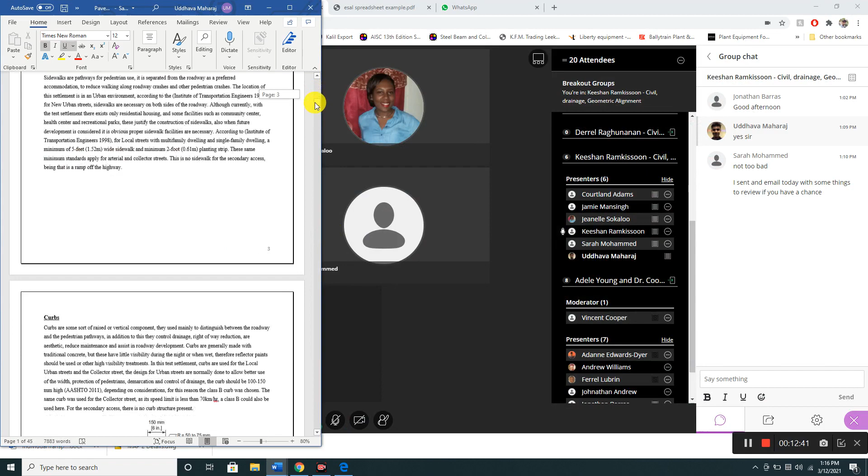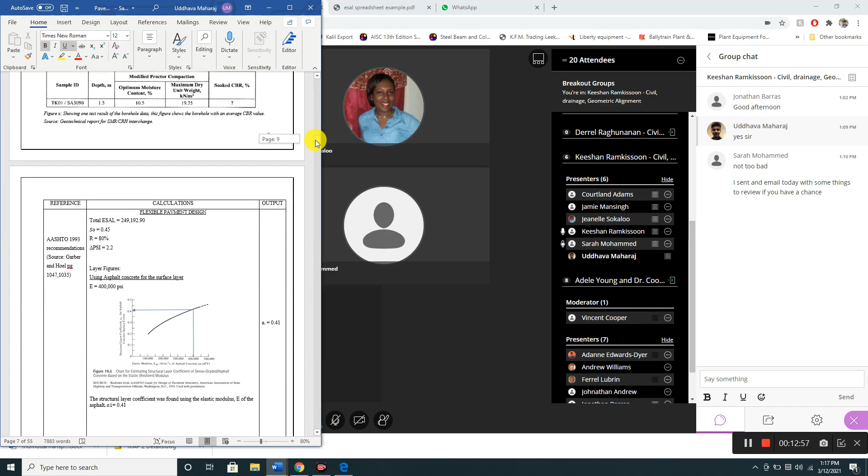It's also one of the guidelines from the AASHTO Green Book. Okay, no problem, so I'll note that down. Yeah, I also saw you use, well, you didn't use the alignment and profile tools from Civil 3D.

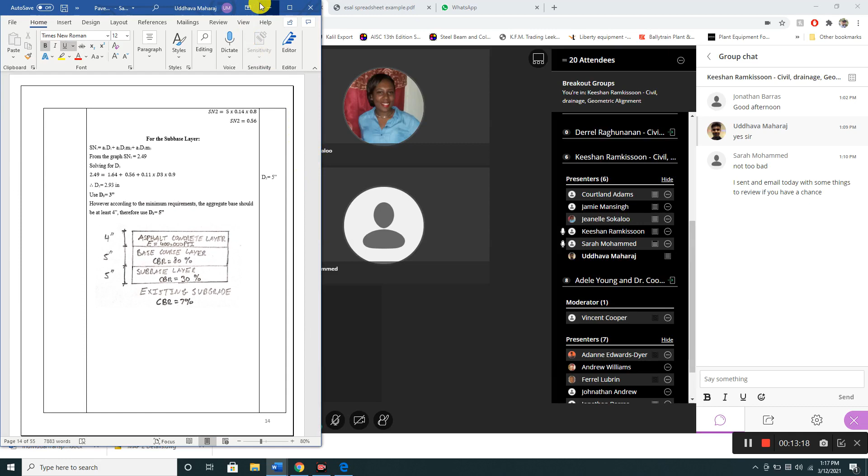Yeah, I did. Well, sorry, the design criteria tools. No? No? Okay, so I don't know. Let me just share my screen. So I'll just show you how to do this pretty simply, and show everyone as well.

Right, you all seeing? Let me know when you're seeing. Yeah, I'm seeing. Yeah, cool. Right.

Right, so this is site layout, simple grid layout. So what do you want to do when you create your alignments? Sarah, how did you create this alignment, from a polyline, or did you create from the alignment creation tools? From a polyline.

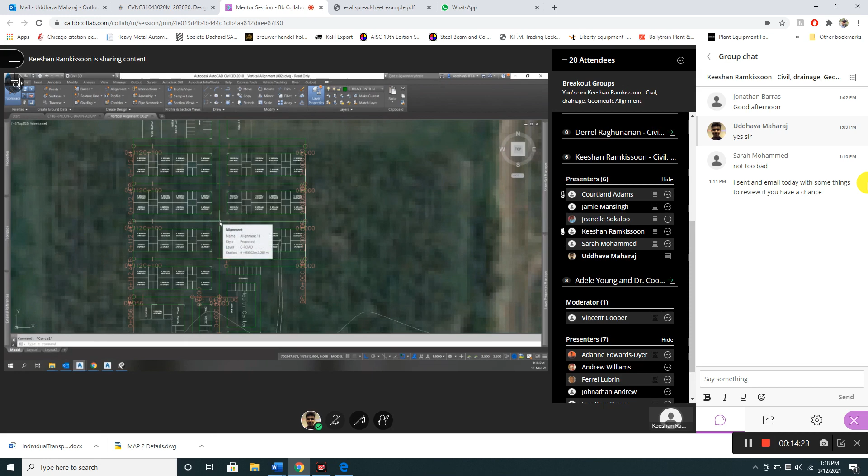Okay, no problem. So when you're doing that, after you use the polyline, let me just do one from scratch. So we have a polyline here. Tell me if I'm going too fast.

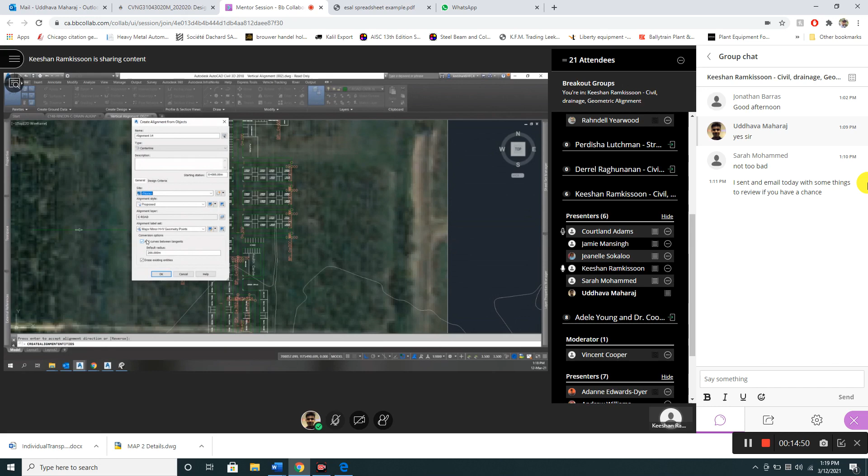All right, so you go on your alignment tab here, create alignment from objects. You want it to run from left to right. Press enter, accept direction, alignment 14, whatever. If you want to automatically add curves, you could do that. You can erase the polyline afterwards as well.

So probably for the internal roads, you don't really need a great design speed. You could use 20 or 30 kilometers per hour. What you would do is check your AASHTO and see what is your minimum radius for that, and then you could probably put in your automatic radius here. So I think for 30 kilometers per hour, it's about 22 meters. So I'll just go 30 meters here. Even though it's a straight line, it wouldn't have anything.

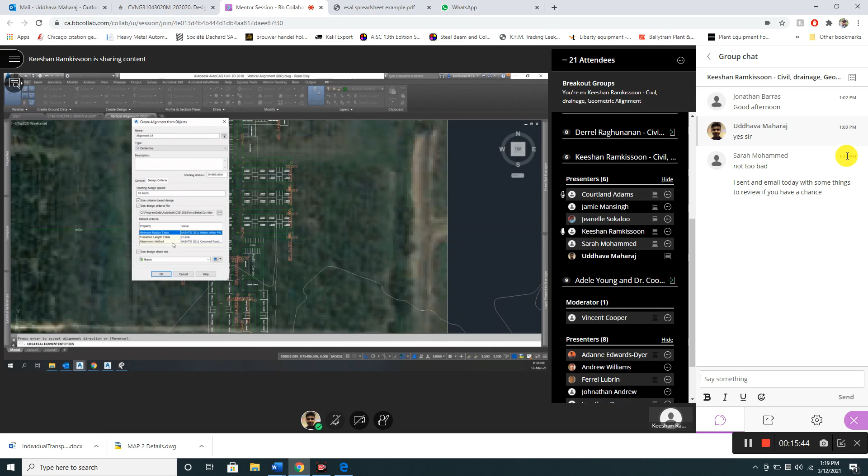But then you want to click on design criteria, and then your starting design speed. You want to put that as whatever design speed you're using, and then use your criteria-based design. Super elevation, just keep it at 4%, regular 2-lane, and then your attainment method. You don't have to worry too much about super elevation in your stage, but this is just general information. So then you press OK, and you create your alignment.

So that's for a straight line. So if you had a line, let's say - this is auto is on - so let's say we had a line like this. Some people's site may be varying, you'll have curves in it, and you want to do your alignment like that.

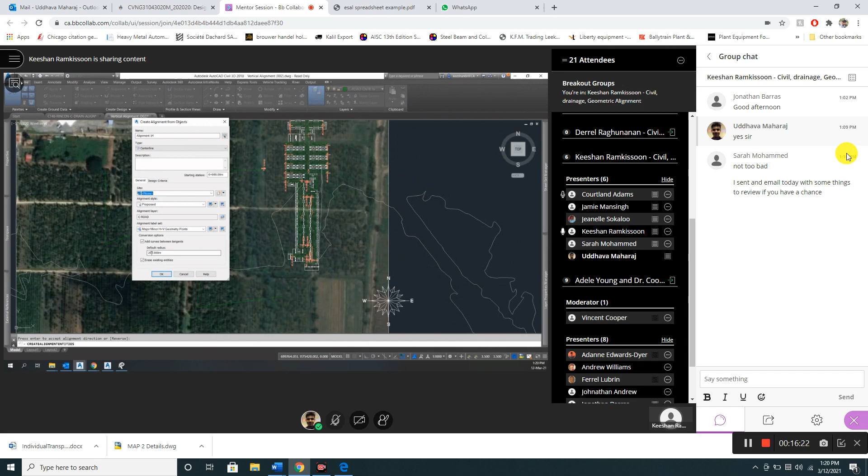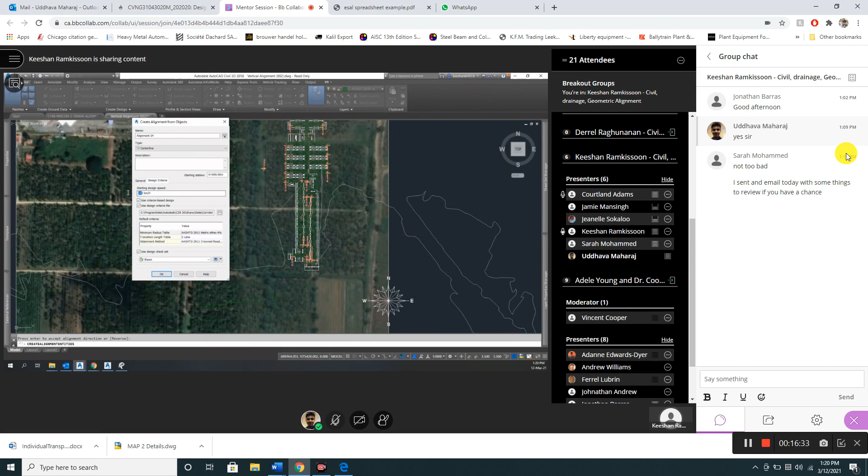Starting from the northern section, enter alignment, whatever. Say this is a design speed of 50 kilometers per hour. The minimum radius, I think, is 86 meters. So let's go with a default radius of 90. Design criteria, put in 50, press OK. And there you would see it automatically generates your alignment with your curves to the 50 kph design speed.

But I think some of these curves are actually kind of smaller than 90 meters. So what you would do, go on your alignment geometry. From this layout here, click on your panorama. Oh yeah, we have some radius that are smaller than 90. So we can always adjust that manually. I probably won't get to the minimum radius here, but this is just how you do it, just an example.

Everyone follows that? No? Yes?

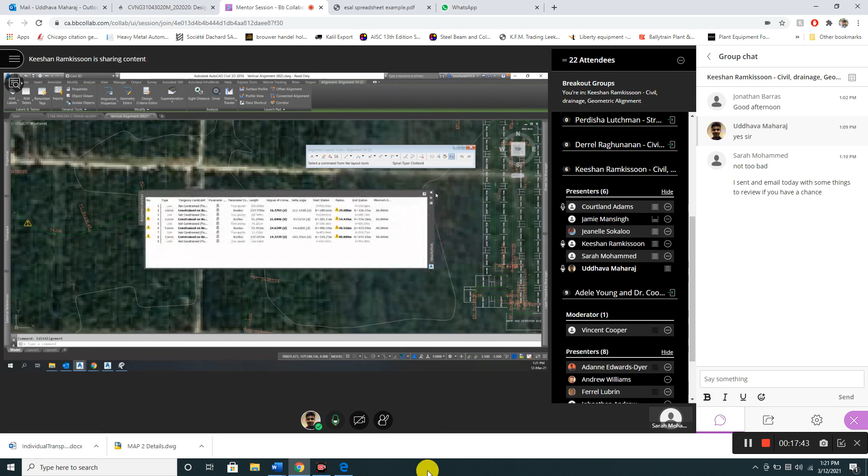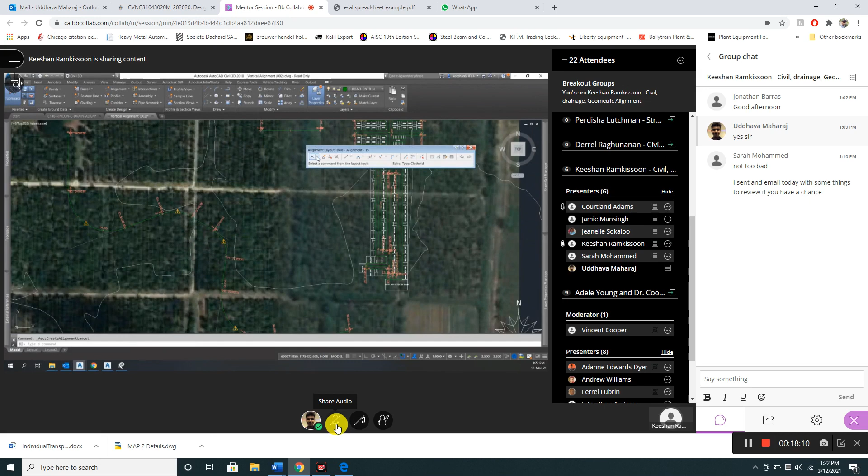Yeah, right. And well, if you want to create your alignment from scratch without using a polyline, go on alignment creation tools, put in your whatever name we have here. I think we reach alignment 15. And label it whatever. Design criteria, so you want to go 50 kph again. Press OK, and then from this you want to click tangent with curves.

So you could do that a little easier. Right, so that's how we create alignment. Pretty simple, no rocket science in that.

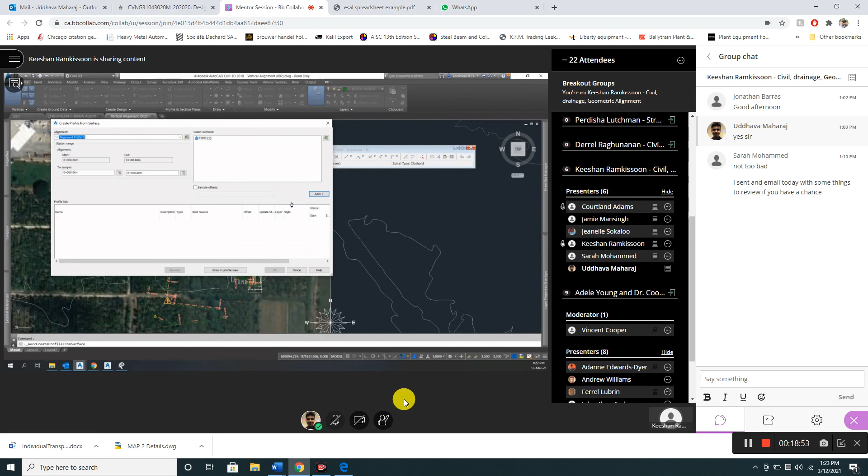Time for the profiles now. This was alignment 14 and 15. You go on your profile tab right here, create surface profile. You have the surface here, I think, what are we - I think it was this one, probably 4th, whatever the name is, you add the surface. Draw in profile view, you could edit your station range and profile view height and these other stuff.

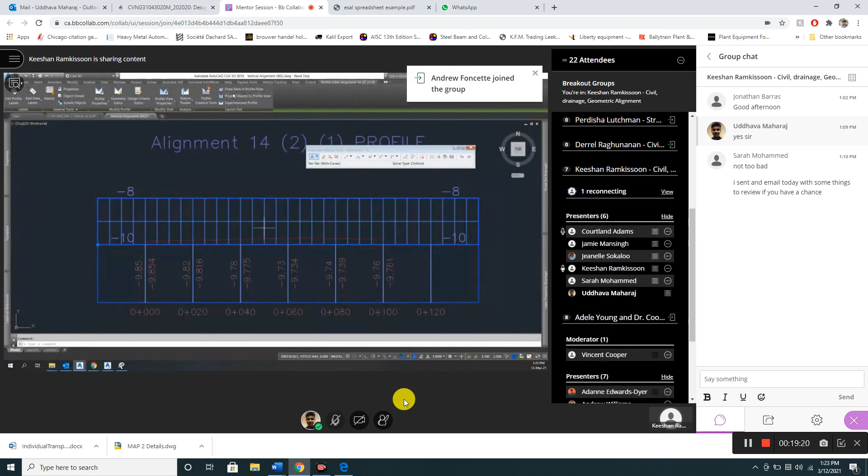Click a profile. So this is the existing ground profile here. Again, with these negative elevations, it seems kind of off. And then after you have your profile view, profile creation tools, so this will now become your proposed road profile. You can name this proposed. That's okay. Oh, there's one thing I forgot to do with that - draw a tangent with curves.

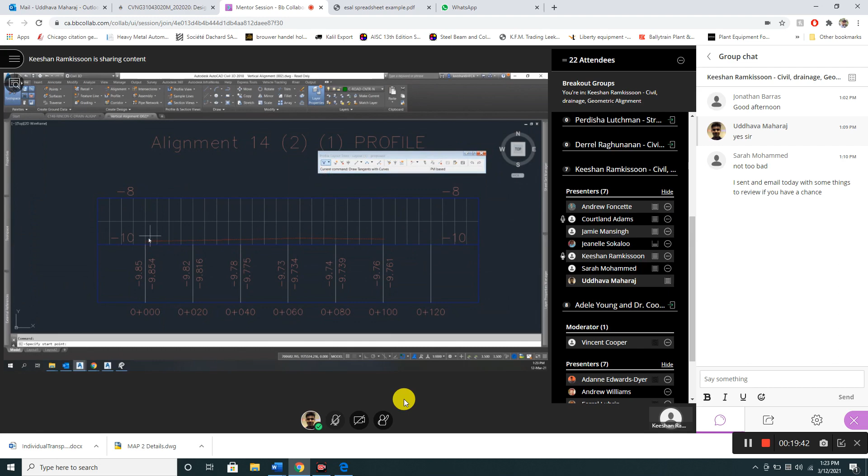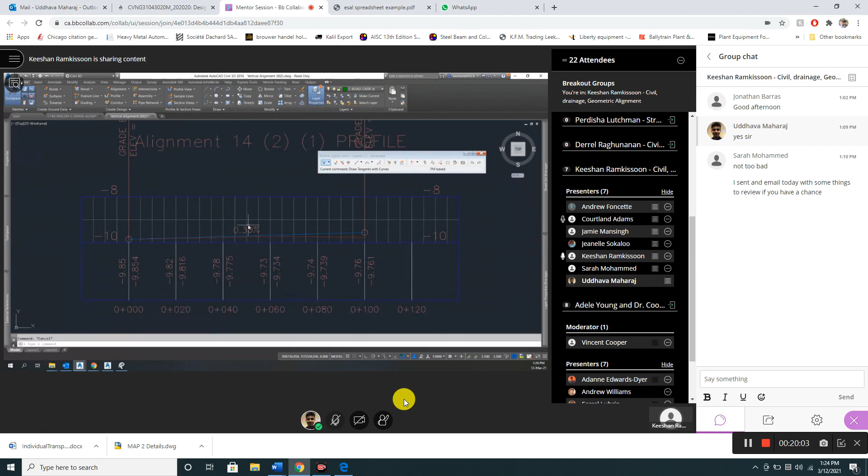And because you want to go with a negative 0.5% or so - 0.17, that's pretty shallow as well. You can go down to 0.3%, but it's not really recommended. But if it's a really flat site, 0.3 is fine.

It also helps a lot with your drain profiles for your roadside drains, because your minimum slope for your roadside drain should be 0.5 as well. You can go down to 0.3, but that's the absolute minimum - 0.5 is recommended. So when you have a roadside drain at the same grade as your road, it's a lot simpler for construction and design purposes, because you could automatically figure out the grade at a certain point in the drain based on the road profile, since you're matching back the profiles for the drain as well.

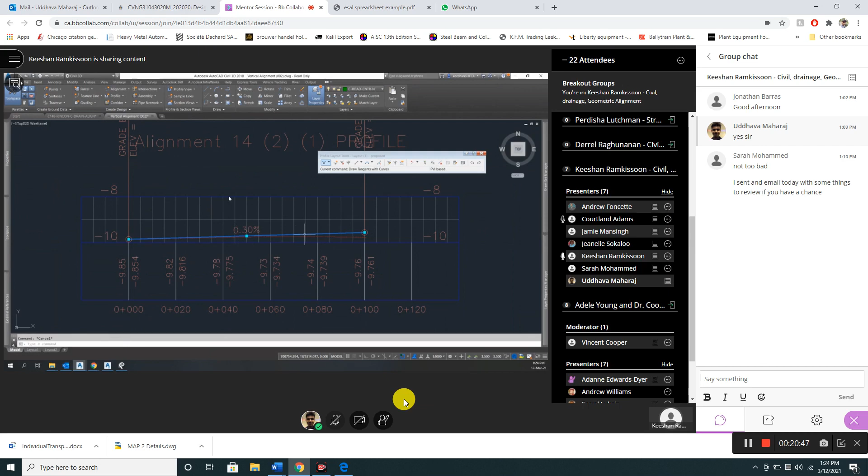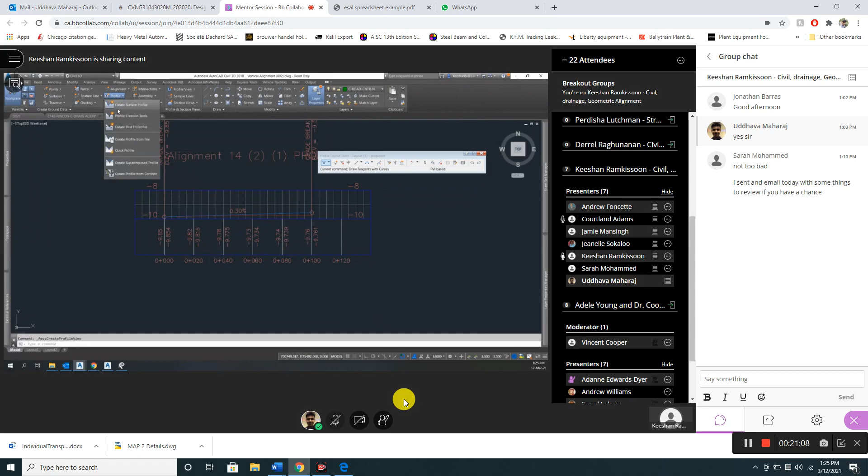There was one thing I forgot to tell you about. So if we go to another profile - I think there was this other one - yeah, draw profile view. Oh wait, sorry, I forgot to do it again. Create surface profile. 14.2. No, it seems like I have to do it afterwards. Okay, no problem.

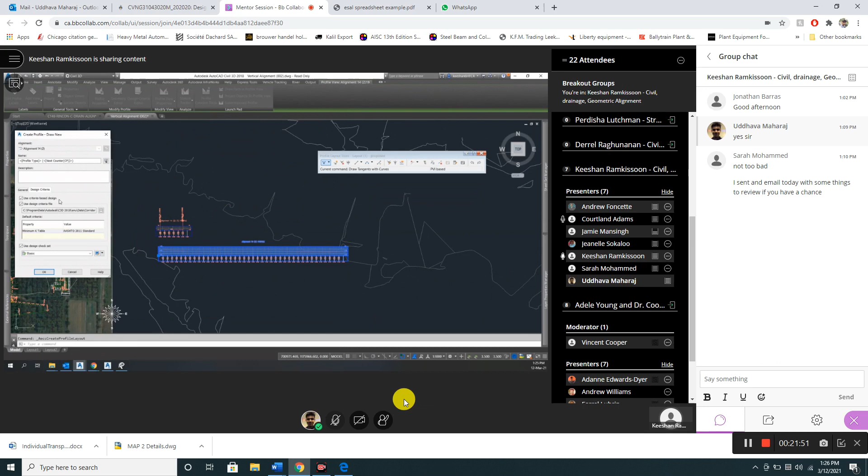Okay, right. So when you're creating a profile view, your proposed profile, you go on design criteria again, click use criteria-based design, and that will pull out the design criteria you need for your design speed. If the alignment was 50 kph, when designing your profile, it would automatically choose design criteria for 50 kph. So when you click OK and create your profile with curves, it will automatically create your profile curves with the criteria for 50 kph.

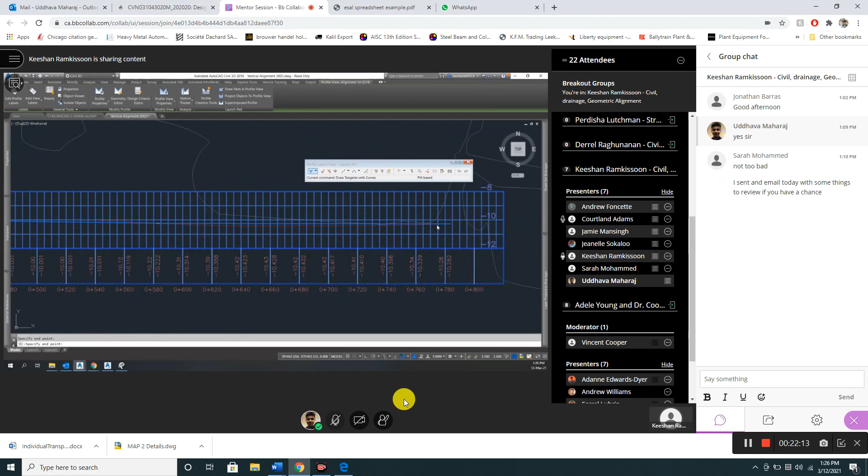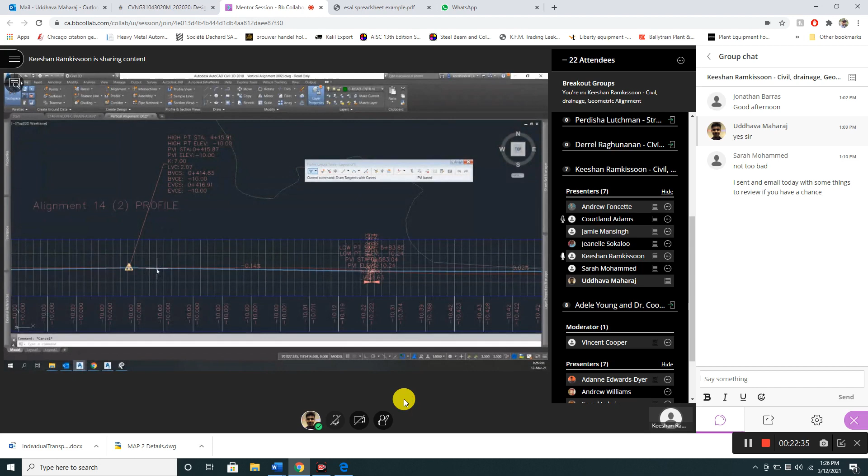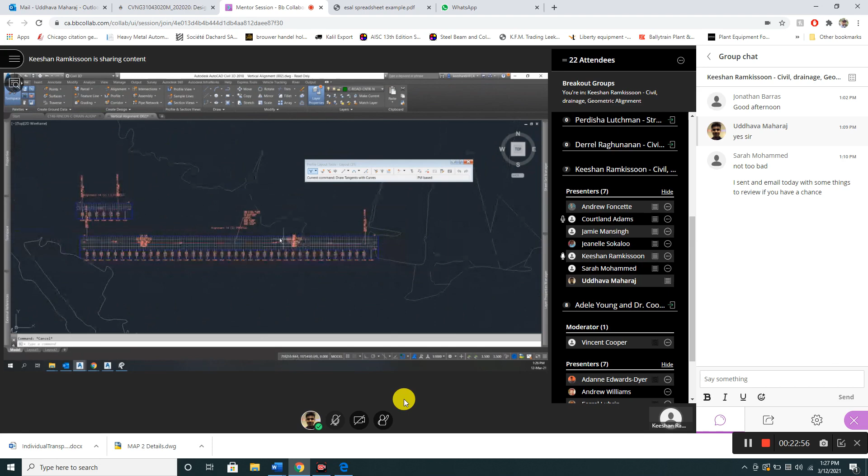This is a bit small - well, I guess because the grades are so small, it won't need much of a curve. So you can see here, for this curve, the K value is 7, which is the K value you need for a crest curve at 50 kph, I think - almost 50 kph, so that's why it was 7. But you might want to widen that proposed curve a little more, just for appearance purposes, because you don't want it to look like just a point in the road, even though the grades are small. It would mostly work for a rolling site where you have big variations in profiles.

So we're good with setting alignments and profiles, knowing how to create it. Any questions on that? Any issues?

Yes, sir, I'm a little confused with the 0.5% and so on. I was following the AASHTO guidelines, and if I'm not mistaken, I think I saw for the type of terrain that I had 10% as the maximum grade. Yeah, so the 0.5 is the minimum. Sorry, did I say maximum? Oh, okay, alright. So I was saying that would mean I'd have a lot to cut. No, for sure, 0.5 is the minimum.

Okay. After, can I share my screen? Yeah, sure. Let me know if there's any other issues with creating your alignments and profiles.

So what do you suggest I should try and do to fix the negative elevation? You might have to do some sort of datum shift with your points, but I'm assuming the file you received from Dr. Cooper would have been correct. So you just have to double check that you used the correct file, and when inserting your points, that the elevations matched up correctly.

How did you get the file - was it a point file, as in a CSV file, like an Excel file? No, it was a DWG file. Oh, then - so it was like, okay then. But if it's already created... Yeah, everything was created, and it's georeferenced and everything.

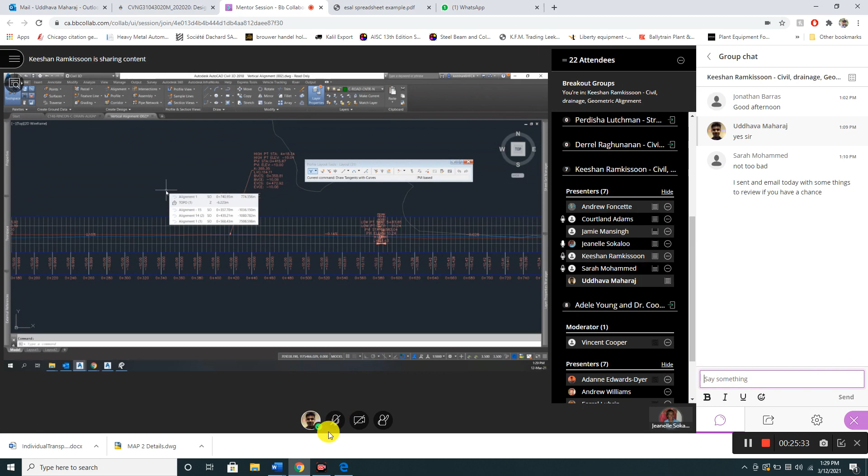Very strange - has anyone else had that issue? No, sir, for last queries we were not given that information. We had to export it ourselves from ArcMap and then create the points. Right, okay.

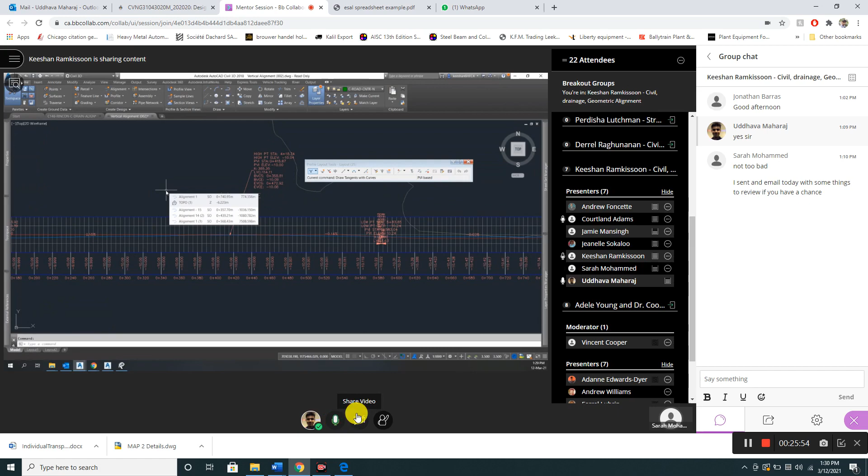You don't usually do alignments for sidewalks, so it will be part of your layout drawing, but you won't create an alignment for it. Your profile is only for your road, just for presentation purposes.

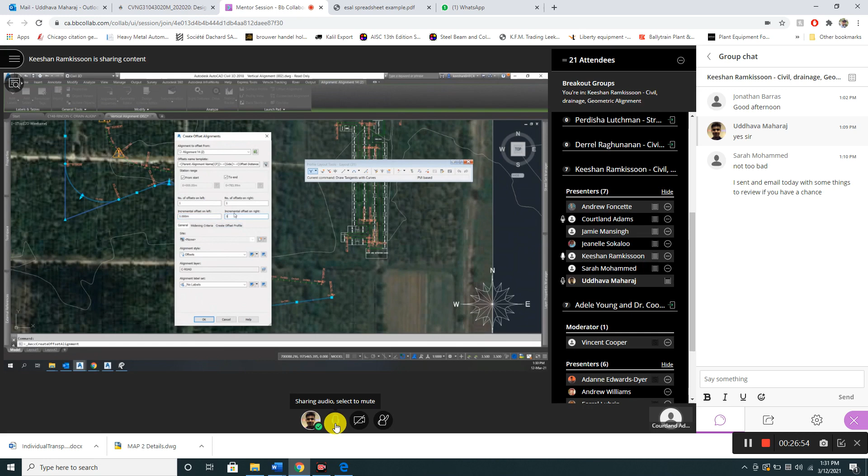So what you could do is, when you click on your alignment, go here and create an offset alignment. So if your road width is 3 meters - your center line, your lane width is 3 meters - you put 3 meters on your left, 3 meters on your right as an offset. Nothing else to interfere with here really, press OK, and it will automatically generate your lanes. So from your center line, you have 3 meter offsets for your lane - this will be your roadway here.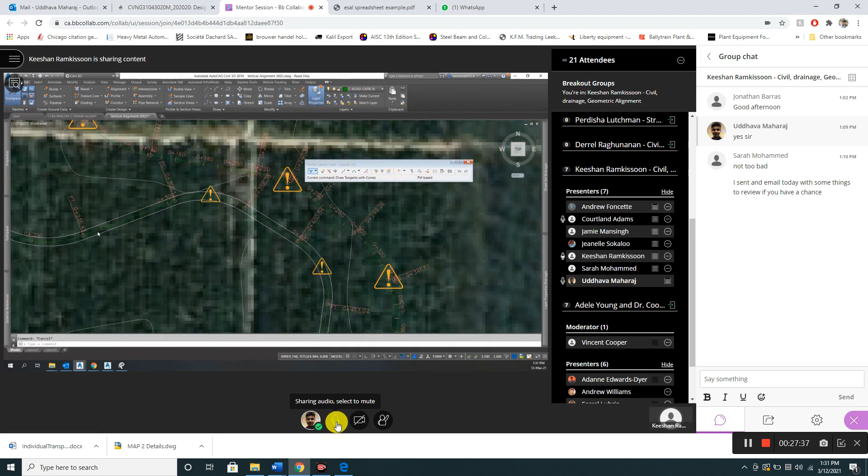Yeah, you would have a couple different alignments. So last week I was showing you La Brea. My project is in La Brea, but I'll show you another project I'm doing right now in Rincon, which is actually south of the Las Cuevas site. So this is...

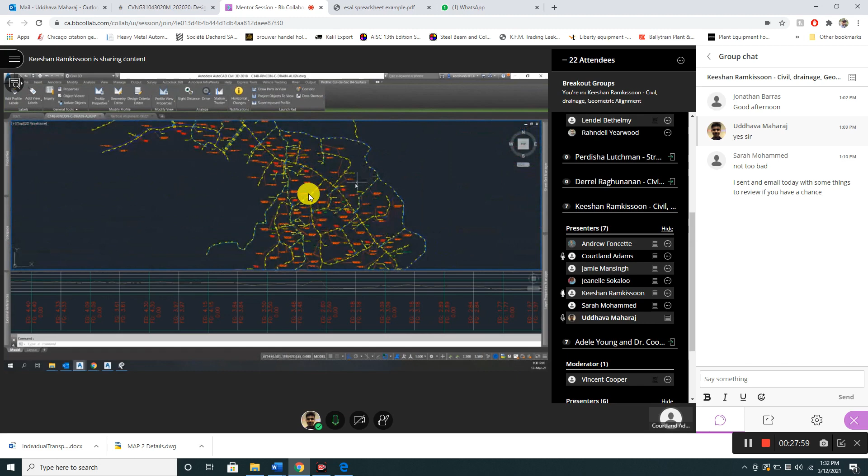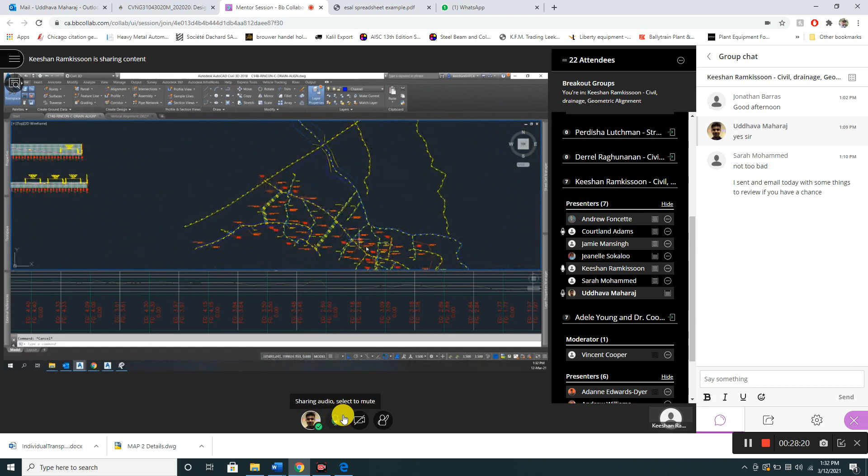My road network here with my drains. So this road here, this alignment, is North Coast Road. So Rincon, so your Las Cuevas site is somewhere around here. So this is my main road here. I put it to 50 kph design speed, and the internal roads, which are all the different alignments, are 30 kph.

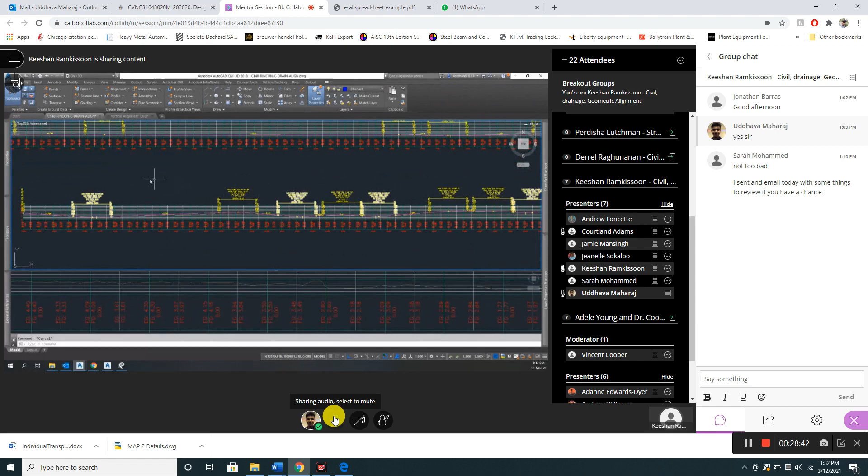So what you would do is create alignments and profiles for each one. From that North Coast Road alignment, I created a profile. These profiles just match the existing road because it's just an upgrade, not designed from scratch. It's existing roads, so you then create your profiles to suit based on the design criteria.

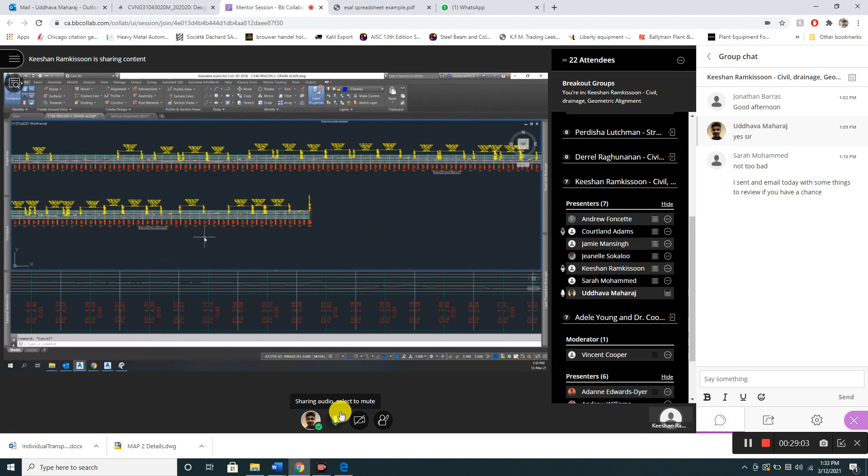Yeah, makes sense. Mm-hmm. Right. Yeah.

I'm just trying to remember. Let me just pull up your stuff here. Sorry.

So we had alternative one. Right, so you had a primary road access, and that primary road access was from Orange Grove Road.

Okay, so it's just one way in, one way out, basically.

Oh yeah, that's cool, so that's the secondary road. I mean, just one lane. So yeah, it could be classed as a collector. It's not a problem, it's not a main arterial. In fact, collector might be right, there's no loop to them, but yeah, collector is fine.

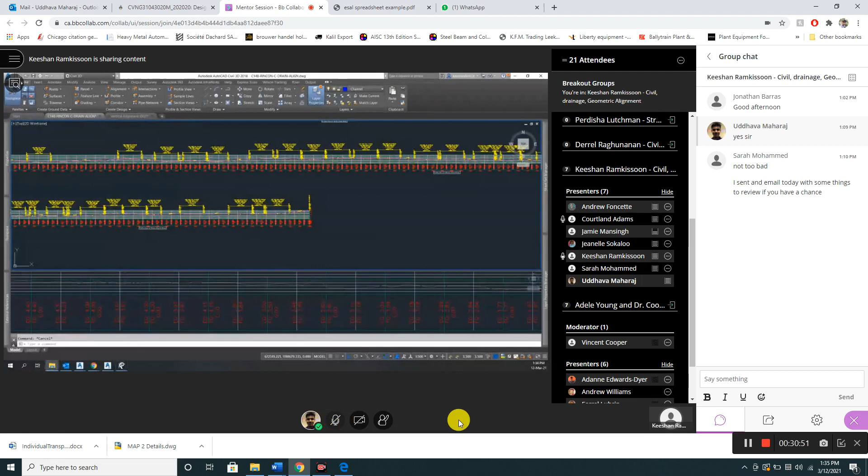Yeah. Yeah. Right. Any other issues with the alignments and profiles?

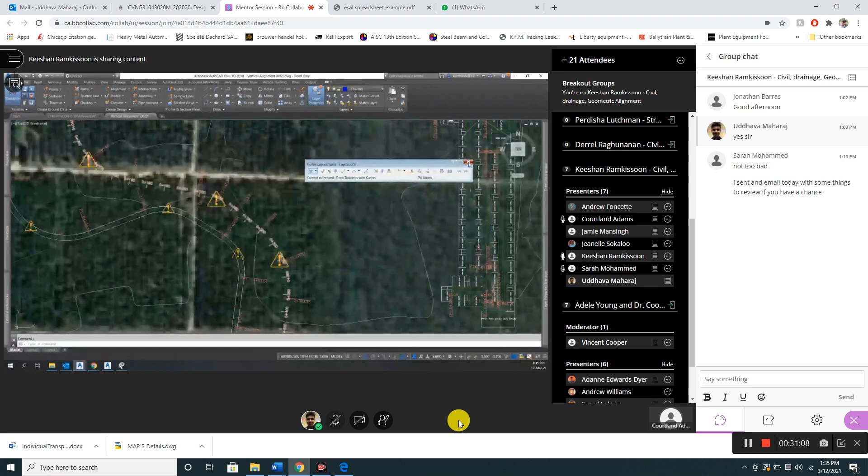So could you go through how to do the cut and fill section? Ooh, cut and fill. Okay, let me see if we could do that here. The only thing I did was draw the grid for it above, but I didn't do anything after that.

Okay, cut and fill, I have certain tools I would use for that. I want to create a sample line. Sample line is this one. Oh sorry, let me bring this across. Right, so create a sample line.

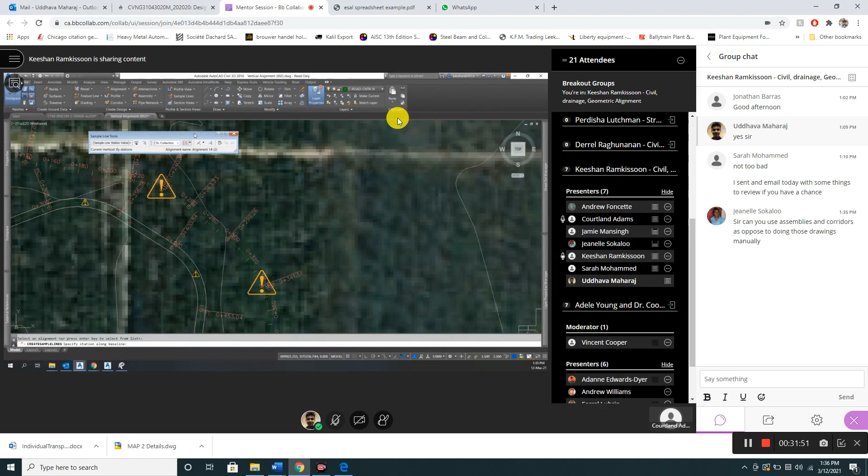This one, no, sorry, range of stations. I think we want to do it at 20-meter intervals, right? What was your cross section? Should be at 20-meter intervals. Your cross section drawings should be at 20-meter intervals, right?

Yeah, but when I did my horizontal alignment, it wasn't at 20-meter intervals, and I didn't know how to change that.

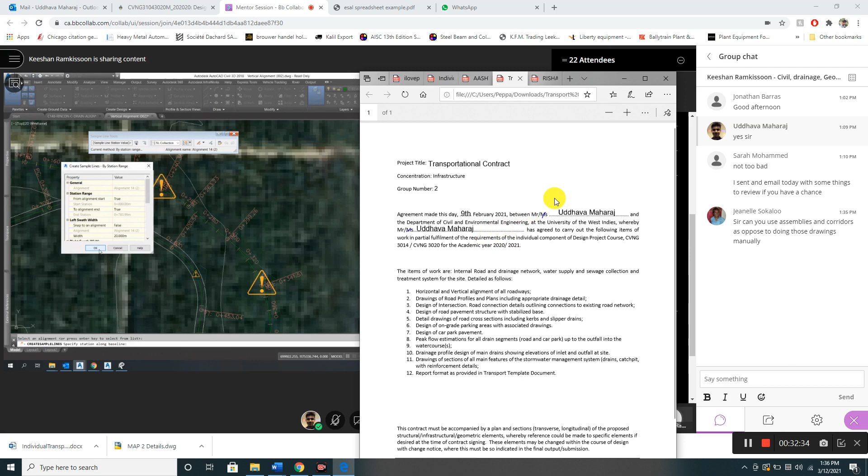You probably have to go on your... okay, let me see if we adjust afterwards. Right, okay, so these are 20-meter intervals. So from your sample lines, I think there's a way to adjust it for your group properties, sample line group properties.

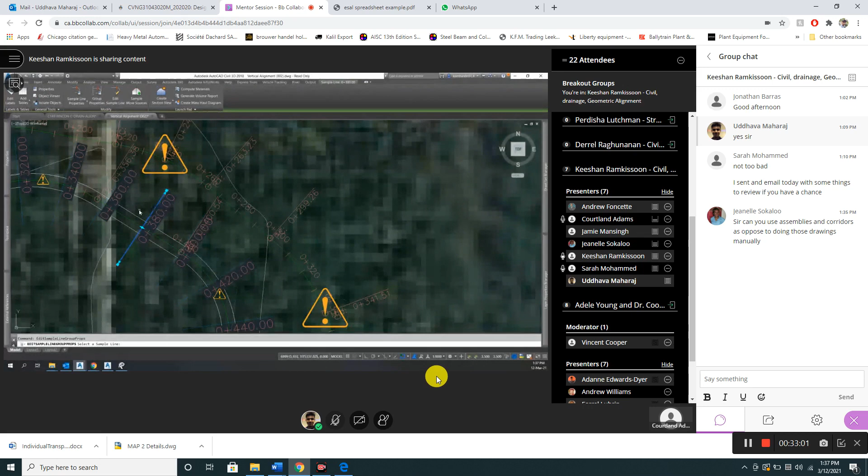So when you click on that, all right, I think you could adjust the station here. It's not allowing me to adjust the station. So what interval did you add it at?

Let me check. Just whatever it gave me when I created the alignment. You can see if you go around, you'll see it.

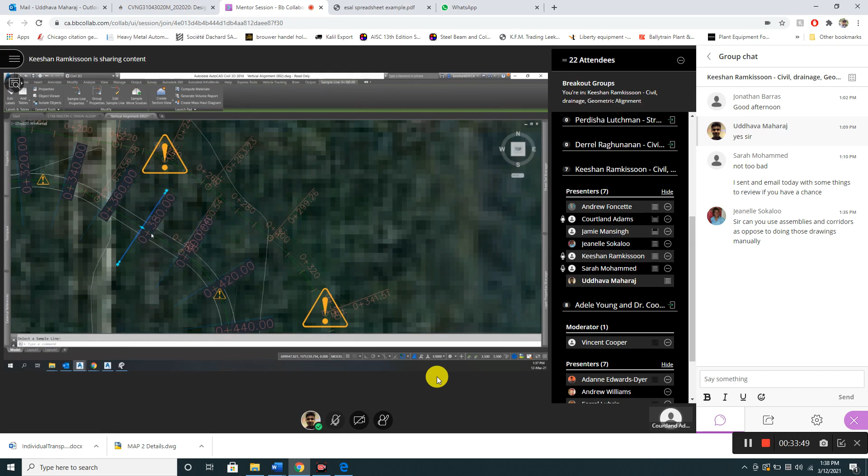Oh, do you mean labels? Yeah. Oh, labels. Okay, well that's a little simpler than the sample lines and the section views.

Okay, so click on the alignment. What you do is edit alignment labels. For your major station, that's the one with the actual chainage on it, you want to put that to 20 meters. So just adjust that to 20, and your minor to 10, click OK, and there you go. That's how you adjust that.

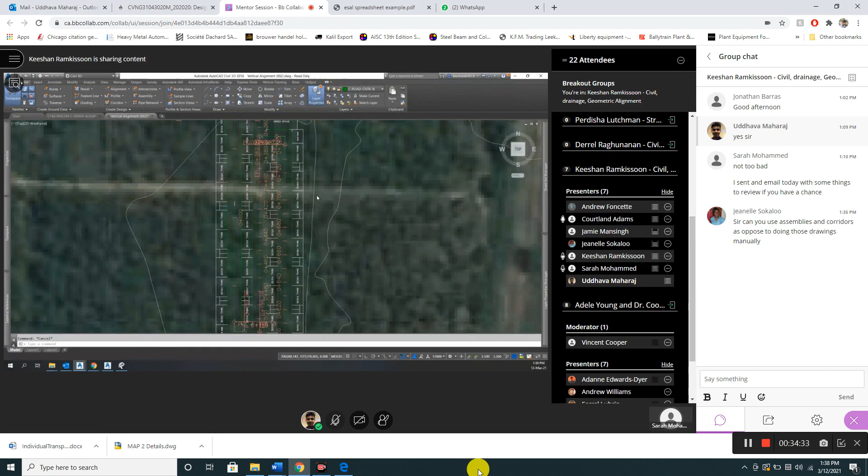Okay, great, thanks so much. So that's the label, that's not the cross section. Oh, okay, yeah. So what I generate here for the sample lines is for your cross sections.

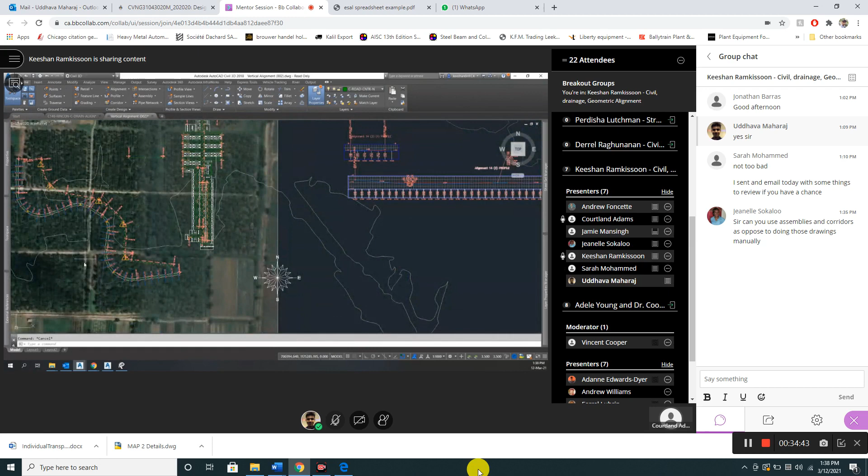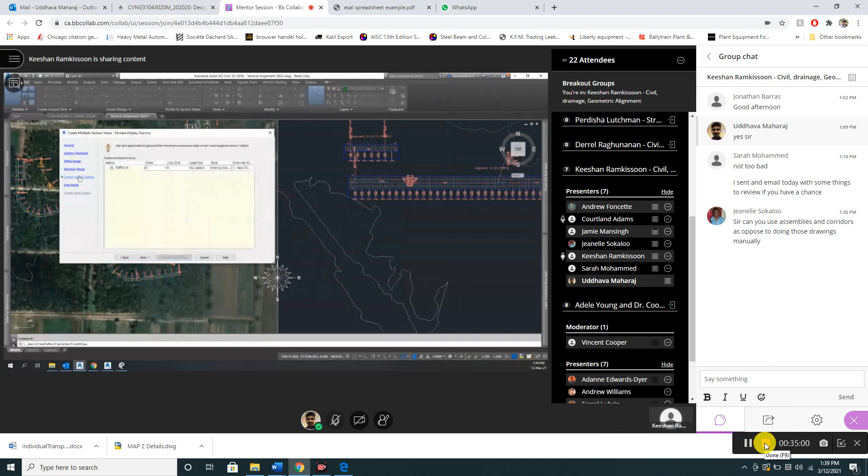So after you do your sample line, you want to just do your section view, create multiple views. Yeah, all this should be fine. Offset range, section placement is fine. Offset range, right, elevation varies, that's fine. Create section views.

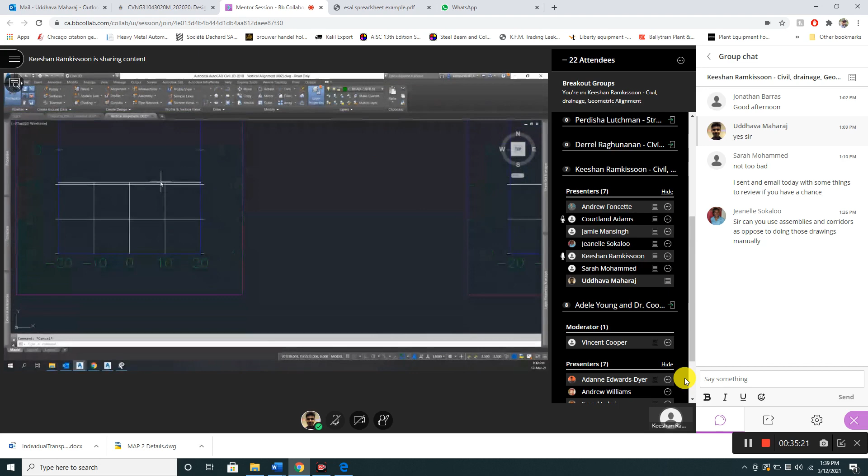It should come up automatically. Right, there you go. Oh sorry, I should have moved this. Right, because your elevations are so flat, that is coming up negative. Well, it's negative and it's also very flat, so I'm not seeing much of a difference.